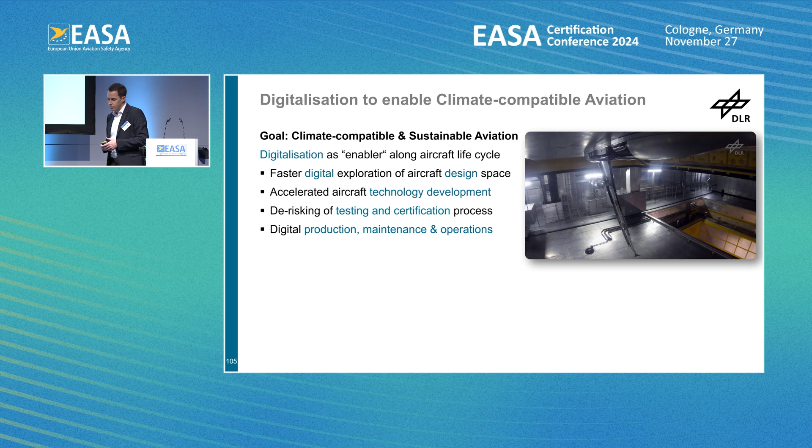We can also accelerate the whole development process if we digitally connect end-to-end the phases, from design, manufacturing, up to testing and certification. And later in the life cycle, we can apply digital twins or AI methods to series production or to operations, for example for prescriptive maintenance or climate-optimized routing and operations.

So in the end, we want to exploit all these digitalization methods, but on the other hand we also have to regulate them, as for example proposed by EASA and their AI roadmaps. So from the DLR side, German Aerospace Center, how is this covered in our aeronautics program strategy?

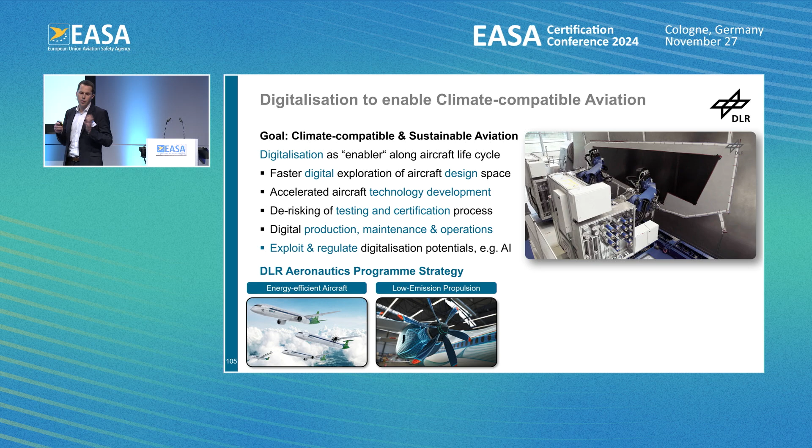Actually within 4 pillars. The first pillar is the energy efficient aircraft, covering mainly the airframe, so energy efficiency by new configurations, components, but also improved aerodynamic structures, materials, and systems.

Then the low emission propulsion, both for improved conventional engines like UHBR and open rotor concepts, but also completely new propulsion or energy concepts like, for example, SAF, hydrogen, or hybrid electric or batteries and fuel cells.

And then the emission-reduced air transport system, including atmospheric research, climate impact, or also improved ATM concepts. And then the 4th pillar is digitalization, really cross-sectionally enabling the other pillars, as described before.

So the focus today is on virtual testing and certification, or certification by analysis, concerning the timeline, because this was in the title - how long, how far, how fast.

We can say, on the one hand, we have really short-term projects and milestones up to the end of the decade, and running projects to certify specific components virtually. But we also see this topic of virtual certification as a long-term vision and goal together with our partners, so up to 2040, 50, and beyond.

So what is now the benefit and the objective of virtual testing and certification, and also the challenges? First, the idea behind virtual certification...

is really to apply modeling, simulation, and analysis to complement or support physical testing, also to partly replace it or reduce it, but not to fully replace it. So we always need physical testing and virtual testing.

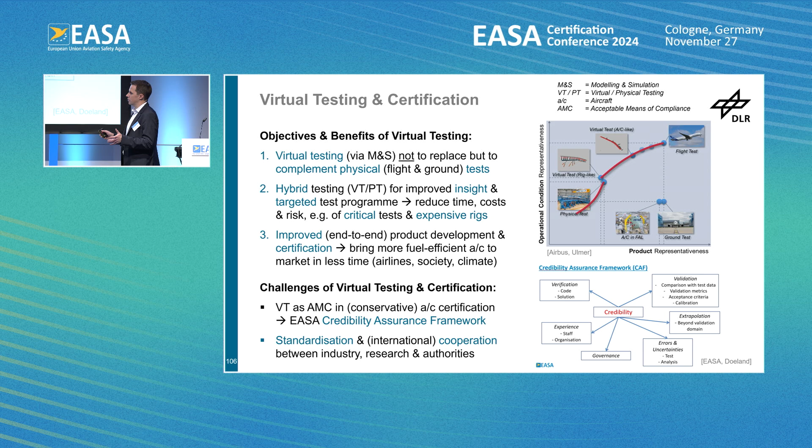Here we have nice activities of international working groups, also with industry like Airbus, Boeing, other companies, and research organizations like ours and the authorities, FAA and EASA, producing new guidelines and documents to push this forward. In the end, doing all this can even in short term bring more effort.

But on the long-term view, we really believe that this can yield the benefits that I showed before. So now coming from the generic view to DLR-specific examples, again we have our hybrid or even triangular view of virtual physical testing up to flight test.

Then in this building block approach, we see a testing pyramid, here for structures testing for example, so from material coupon up to assembly flight test level, with a trend from more virtual testing on the right side and less physical testing on the left side. Of course, it's only an example, so how much virtual testing is beneficial always depends on the specific test case.

But what is important is really to transfer between the different disciplines and components, we think, because the CAF credibility framework that we showed before holds actually for all of them, and we can transfer and learn.

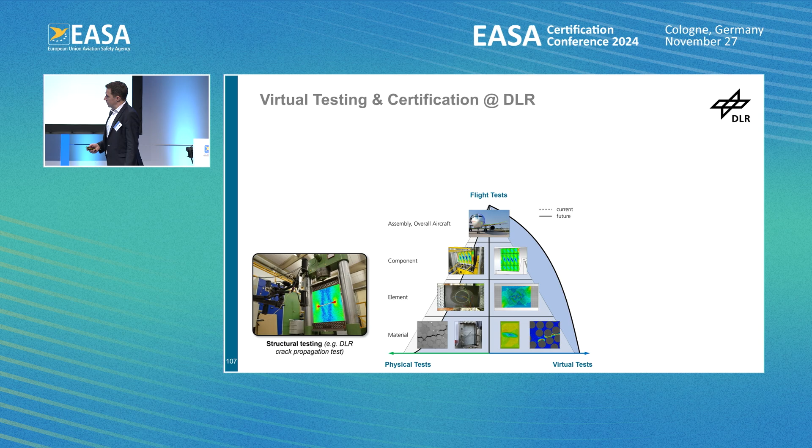For example, a DLR structural testing case for crack propagation tests, virtual and physical. We also make systems testing here for movable components, for high aspect ratio wings, ailerons, now building up this test rig in Bremen, flight control system down to actuators.

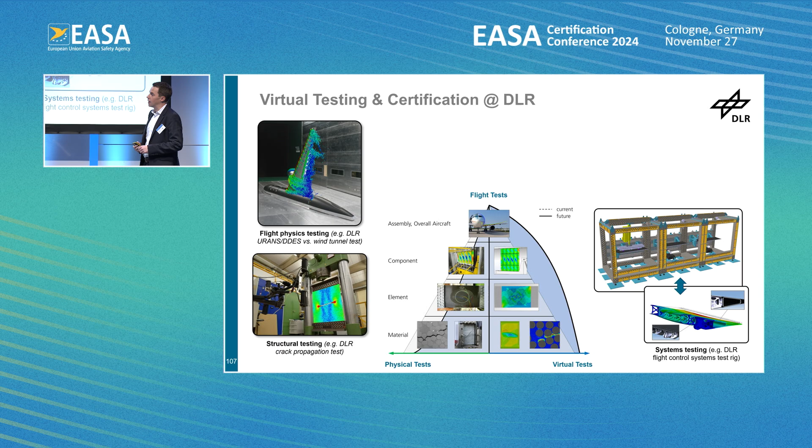Then also in flight physics, we have to combine wind tunnel testing, simulations, CFD simulations, and flight testing. Here an example of URANS/DDES CFD computations for the NASA CRM model. And then up to flight testing, real and virtual.

This we are doing with our flight test fleet in DLR. And again, the cooperation - here you see a photo from some years ago in Cologne between EASA and DLR in the frame of our bilateral cooperation agreement.

So actually now I want to give three examples from DLR side, covering the whole vertical and horizontal level. First, flight testing, virtual and physical flight testing with our test fleet. Second, a test pyramid for one example component like a hydrogen tank. And third, the end-to-end chain for a movable component.

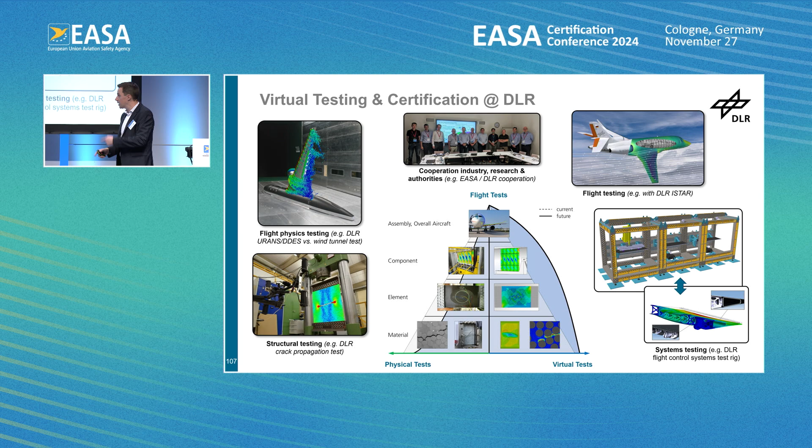So the first example, the ISTAR. Our DLR ISTAR is the newest member of our test fleet. Actually it's a Falcon 2000 LX. We bought it some years ago from Dassault Aviation.

Recently, in the HIGHFLY project with our Braunschweig and Göttingen colleagues, we did some nice flight tests and compared with simulations and computations. Before that, over recent months and years, we heavily equipped this aircraft with instrumentation - IPCT cameras, but also for example pressure measurement belts based on MEMS technique to measure the pressure over and under the wing, only to give some examples.

And with this equipped aircraft, we go into flight testing, only to give some examples. Here you can see the pilot in the cockpit making a bank-to-bank maneuver. I hope the video will start - it's quite large, so it takes a while.

You see the pilot initiating the bank-to-bank maneuver, deploying the ailerons, left, right, left, and here you see the simulation, fully coupled with aerodynamics, structural dynamics, and 6 degrees of freedom flight dynamics. We also vary parameters to see, for example, the influence of rigid or elastic aircraft.

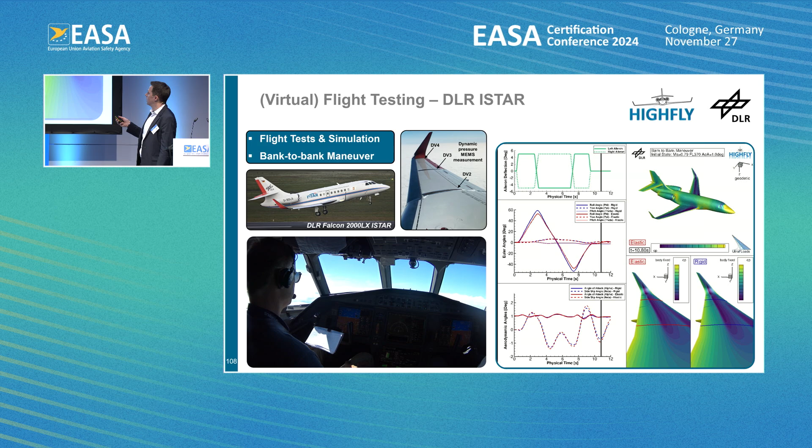Also on the wing you see the pressure distribution here nicely. Then the second maneuver, this is now a pull-up, push-down maneuver at transonic speed. Again the pilot in the cockpit initiates the maneuver, pulling and pushing up and down, and then you can see the simulation again.

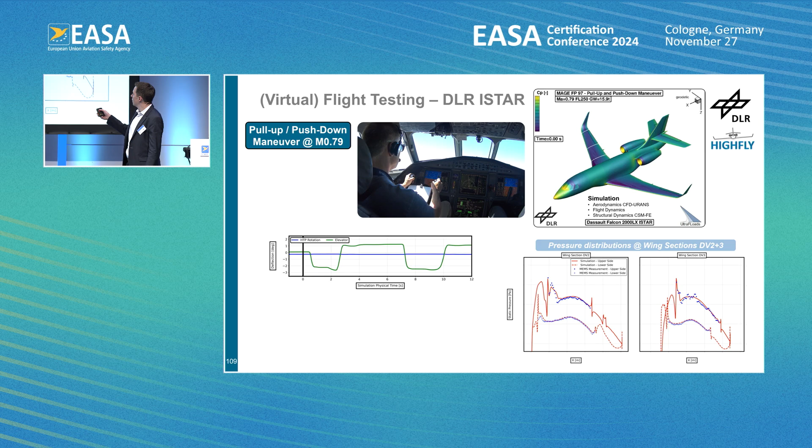And then we really compare the pressure distribution on the wing with CFD computation - you remember the MEMS pressure belts. At transonic speeds it's not so simple, but you can see quite a good agreement, which is good because the sensor technique is quite new and in-house developed. Also for the flight mechanics parameters, we see good agreement.

Concerning the uncertainties and tolerances that I mentioned before, we introduced some bands that are also used to create or build real flight simulators from our testing colleagues in Braunschweig. You can also see that it's quite a good match within those tolerances. So the message here is we are doing that with a lot of flight tests - there are other tests done with EASA, like ground vibration tests, engine tests, and so on.

And here we can learn a lot and also discuss with Dassault and other industry partners, and with EASA, to give recommendations if we can believe these simulation methods and also transfer them to other aircraft.

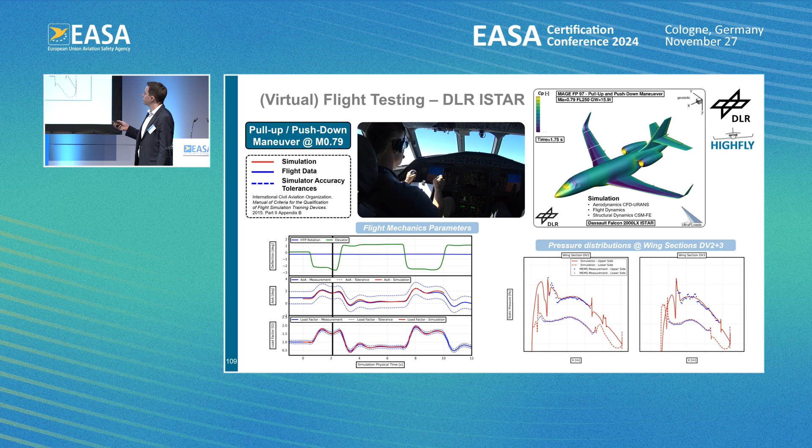Second example, hydrogen tank. I don't want to go into all the details of hydrogen-powered aircraft, but it's really new in aviation and we don't have much experience or knowledge there. We can learn a bit from our space colleagues, for example from Ariane, also in Bremen, from DLR space colleagues who have much experience in hydrogen handling. But in aviation we have much more challenging requirements in terms of thousands of load cycles, load cases, hydrogen handling, tank integration, and so on. It's challenging also in terms of certification, since it's a completely new component. So we need intense physical and virtual testing.

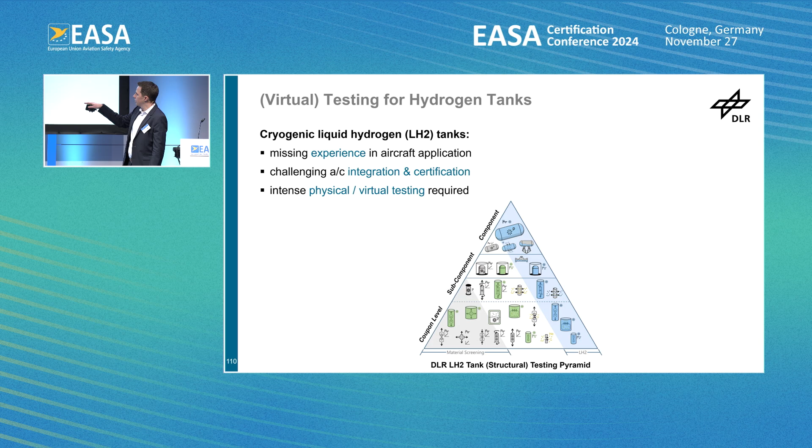At DLR we set up a new testing pyramid in recent years, focusing on structural testing, again with a building block approach. You can see three elements: bottom left, first material screening in gray, then we go up to liquid nitrogen testing before the more dangerous part, liquid hydrogen testing. On the coupon level, for example, we analyze the material first in terms of permeability, permeation of the hydrogen through the walls, both for metal tanks and CFRP tanks.

Here's an example of crack propagation in the CFRP laminates of a CFRP tank. We're also building bigger test infrastructure up to subcomponent and component level, like half tank and full tank tests of different sizes, such as 400 millimeters, and here a 1.7 meter tank test, also for burst pressure tests and permeation tests.

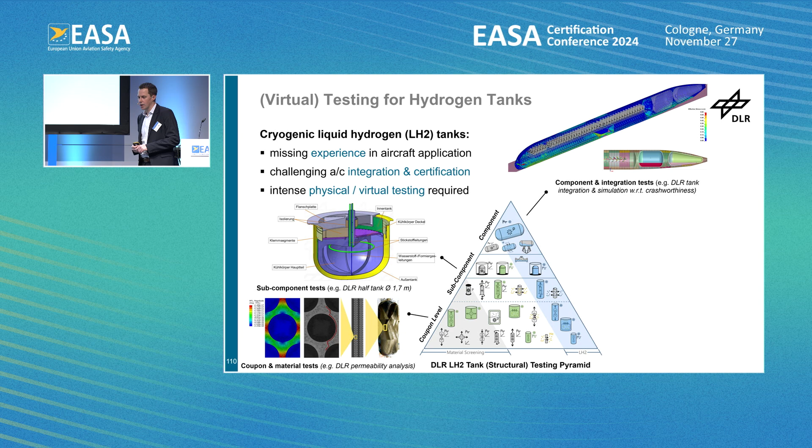Then at the overall aircraft level, simulation is really important if we want to integrate the tank into the aircraft, for example the rear fuselage, and simulate with respect to crashworthiness. We really need simulation because we cannot test so often. We also derive new recommendations from all these simulations that we exchange with EASA, our colleagues from DLR in Stuttgart are doing that.

And then finally, after the structural testing, we of course also need the systems testing. Here's an example of our space colleagues in Bremen with a hexapod with an Ariane tank on it, and the hexapod can simulate the dynamic behavior of the tank with the fluid inside, in terms of sloshing, for example.

We also have to simulate the filling and draining of the tank, including the sloshing. With CFD computation we can simulate the sloshing, which is quite complex compared to kerosene because we have the gaseous and the liquid state, and this behavior is really complex. Also there's the feeding through the pumps up to the engine, and this interaction of sloshing, choking, and so on. This is only to give you some examples.

We need physical testing, but if we also build a virtual testing pyramid, simulation can really help spare or make more specific physical testing, validating in between. We don't know when the LH2 aircraft will come, but maybe this helps get it a bit quicker into the market.

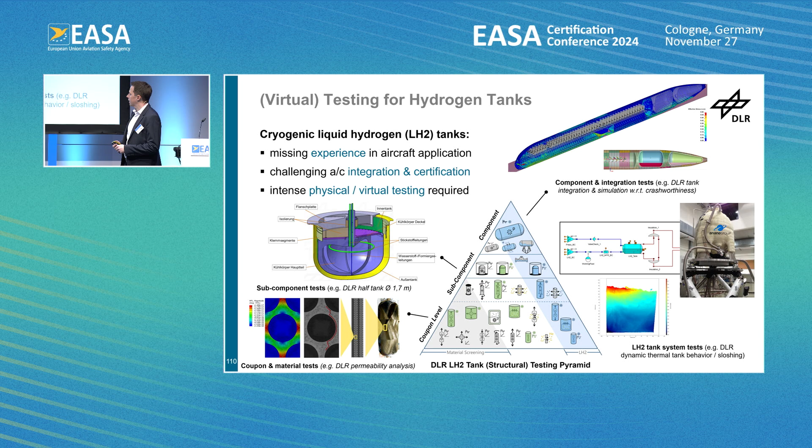Then the last example - you remember the end-to-end chain to really shorten the development cycle up to certification. Here we worked in our Virtual Product House in the ECOMAT Technology Center in Bremen. This is an integration platform from DLR with different DLR institutes, but also industry partners like Airbus sitting in the same building, Liebherr and other companies, and EASA is closely involved on technical and management level for this initiative. The Virtual Product House focuses on virtual certification and end-to-end development for specific components like LH2 tanks, and the main component was a movable of an aircraft wing.

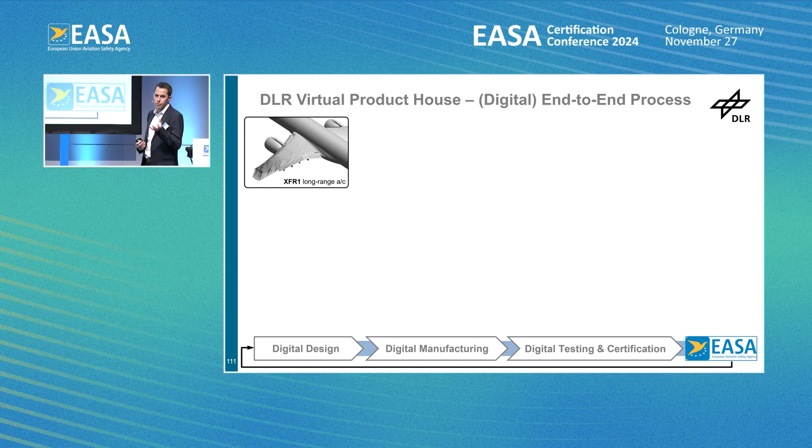So what did we do? We start with an aircraft, simulate and design the whole wing, including all the aerodynamics, structural interactions, the systems design of the flaps, the kinematics of the flap mechanism, like track rear link mechanisms, for example. Then we focused on a specific outboard flap movable and designed a new component, a composite multispar flap - a CFRP component with integral load introduction. And we manufactured it, simulating the manufacturing process first to have both the design and the manufacturing.

And then after the simulation, we also went into physical manufacturing. You can see the video in the background. That means the CFRP type of flap we really manufactured to validate the virtual manufacturing.

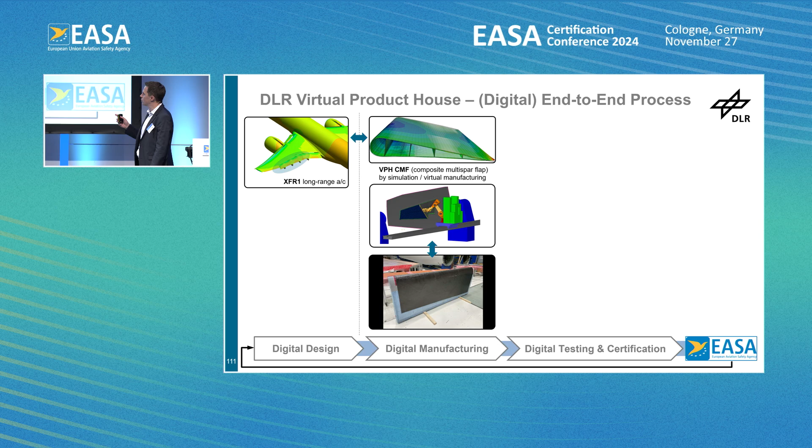This includes all the fiber placement, sensor integration, preforming of the skins and the spars, and then it goes into the autoclave, including infusion and then demoulding. And at the end, you have the manufactured flap.

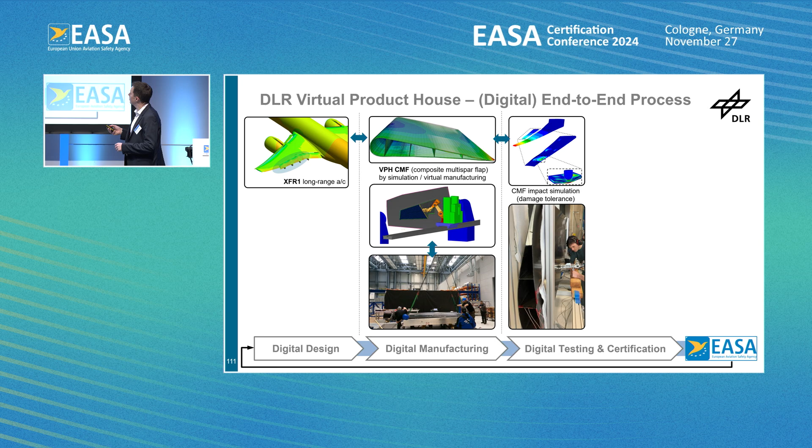With our flap as designed and the flap as built, we go into testing procedures. For example, structural testing for impact simulation and damage tolerance. Again, virtual testing and physical testing to compare, to learn, to validate. And for example, also systems testing.

The systems testing means, for example, if we have a failure in the transmission system, like a shaft rupture or a shaft failure, you can see the movement of the flap in a co-simulation or multi-body simulation, and then the interaction of systems and structural behavior. And we can also feed it back to the flight performance.

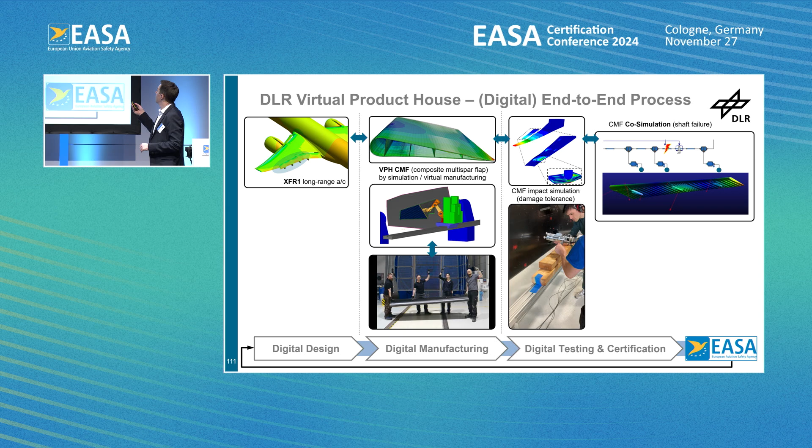And also here, as shown before, we are building now a physical test rig in the next months, and then in the next years testing there together with Airbus in Bremen, but also with Liebherr, for example, for actuator components that are used for the flight control system, to use movables for flutter suppression on high aspect ratio wings. And you can see here the paragraphs from CS25.

So actually here we really produce documents on how to build the model, how to verify, validate, and exchange with EASA on the different paragraphs for systems, testing and manufacturing, to learn from EASA and vice versa.

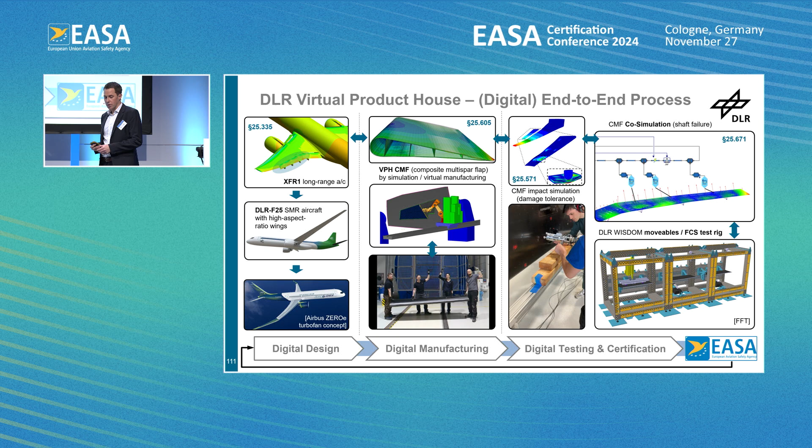And as we said, now in LUFO and Clean Aviation projects, together with partners, we're focusing on the high aspect ratio wing, really applying these movables and also this end-to-end chain, and trying to mature it as much as possible for future aircraft configurations. So, last slide of my presentation.

To conclude, of course, I only showed a few, let's say 3, examples of DLR. Of course, we also have other examples in the virtual engine sector. We have the site, the Crash and Impact Testing Center close to Stuttgart, and also other EASA relevant topics, for example, for UAS in Cochstedt.

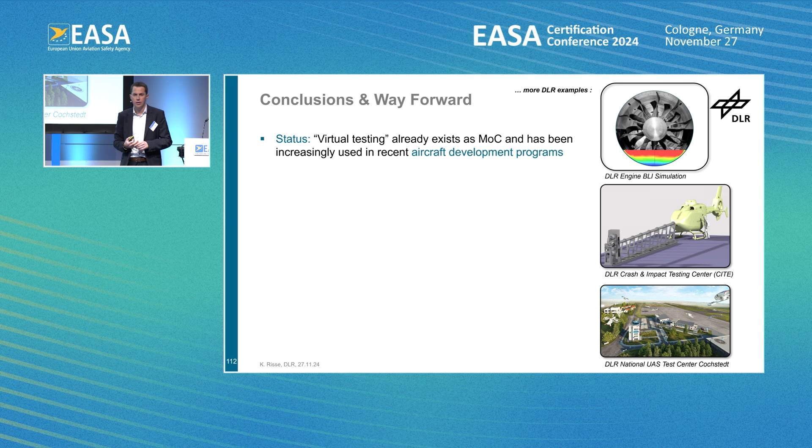But to conclude on this presentation, we can say virtual testing is not new. It already exists as MOC in the CS25, and it has been increasingly used in recent aircraft development programs, more and more, but there's still broad and high potential, including the shortening of the development time and to spare physical tests, especially for new components.

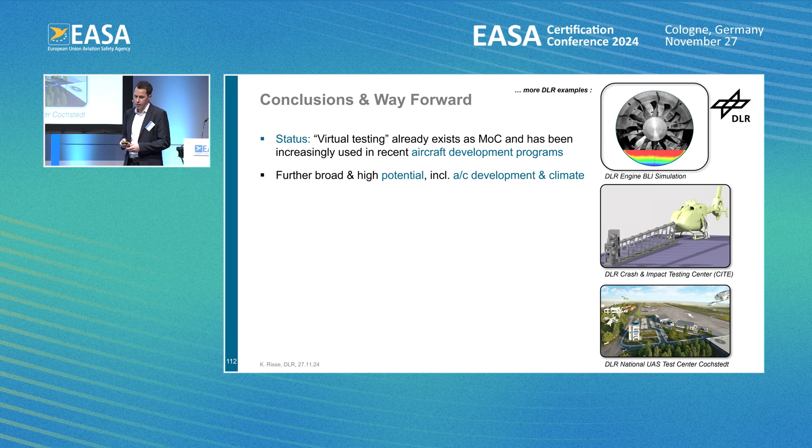But we have the industrial requirements and also the EASA requirements concerning the credibility framework. So what is the message?

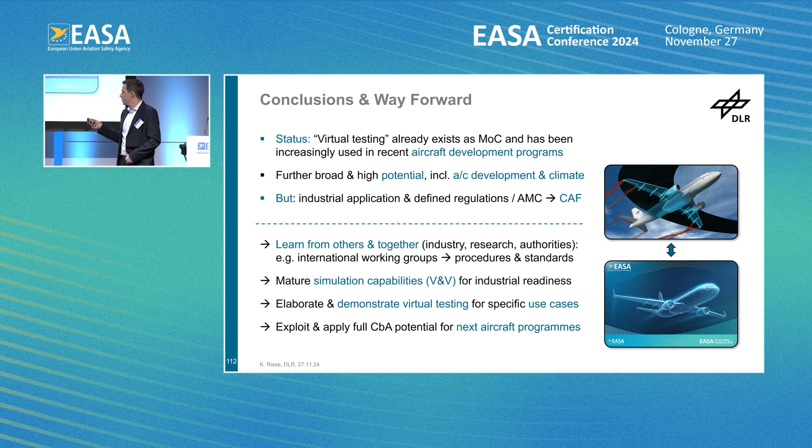And then, of course, mature the simulation capabilities at the borders of the envelope and beyond, learn from the different disciplines and components, and further elaborate on specific use cases, maybe as I've shown before, and really exploit the full CbA potential for next aircraft programs, if it's ready, and use all the benefits I showed before for digitalization in aviation, for climate-compatible aviation.

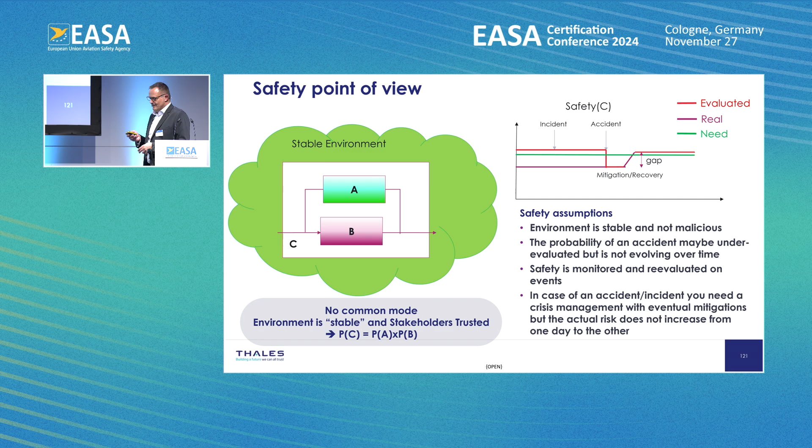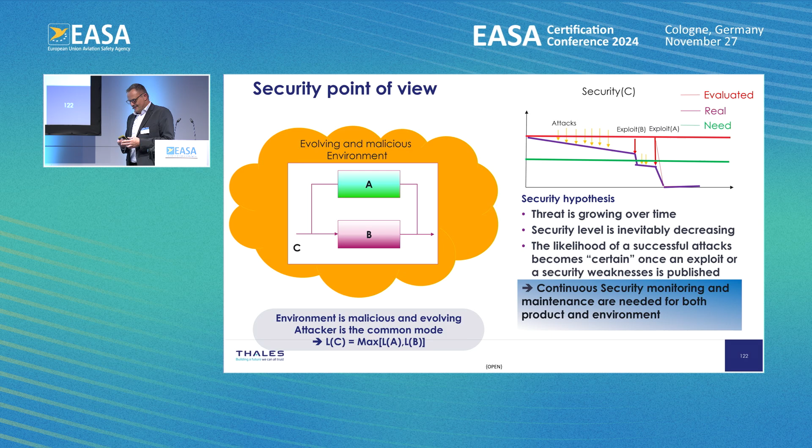What does it mean? It means again that you have to continuously monitor your cyber threats that may impact your systems. So what can we do now? First challenge is that, as you know, cyber threats evolve all over time. There are new cyber threats, new attackers, etc. And the challenge we have is to synchronize the protection of the system with the rhythm of the vulnerabilities that are found.

To do that, we have to permanently monitor incidents and events, as I said before. We have to deploy a policy to quickly patch our systems. If we are acting on an aircraft, maybe the fix will take some time due to certification. So you have to interact outside the aircraft by securing the data outside the aircraft.

So this is a conclusion slide. As I said before, we have to consider end-to-end security for aviation data. We have to make some reflection about the certification process to handle cyber threats and how to fix cyber threats in the frame of the certification process today. We have to prepare cyber resilience in operation, which means that we have to filter and secure all data during operation outside of the aircraft.

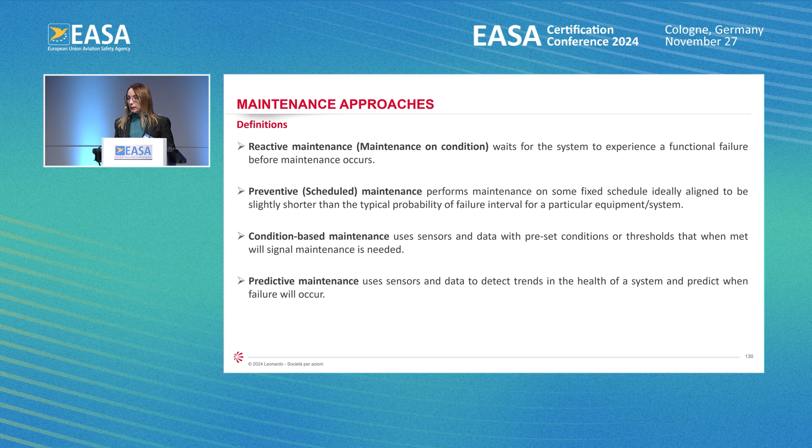Before we start, I would like to do some definitions. We can identify two main different philosophies in terms of maintenance. The first one is reactive maintenance, where the maintenance activity is performed after the occurrence of a failure. The second one is proactive maintenance, which is performed before the occurrence of the failure. Within the proactive maintenance philosophy, we can identify some different maintenance approaches: preventive scheduled maintenance, where the maintenance activities are performed at a scheduled interval, and then we have the condition-based maintenance and predictive maintenance that use sensors and data to provide the evidence that we need a maintenance action, to perform a maintenance action.

Looking at a typical maintenance program for Leonardo Helicopters, we have different inputs coming from, for example, analysis and tests performed during the certification phases, like analysis performed to provide compliance to 29.1309 or 29.571, for example, for fatigue. And then we have also the scheduled maintenance tasks derived from the MRB process, linked to the MSG-3 analysis, together with the possibility to introduce some unscheduled maintenance tasks based on in-service experience.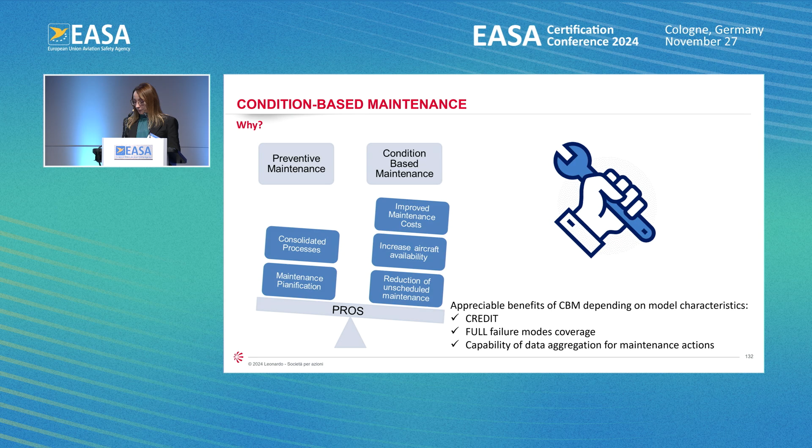All those indicated benefits are linked to the fact that we can take credit for the models that drive the condition-based maintenance, and we also have full coverage of the failure modes that require maintenance action, together with the fact that we can have data aggregation so that we can organize the stop of the aircraft based on the opportunity linked to the operability and the environment of the aircraft.

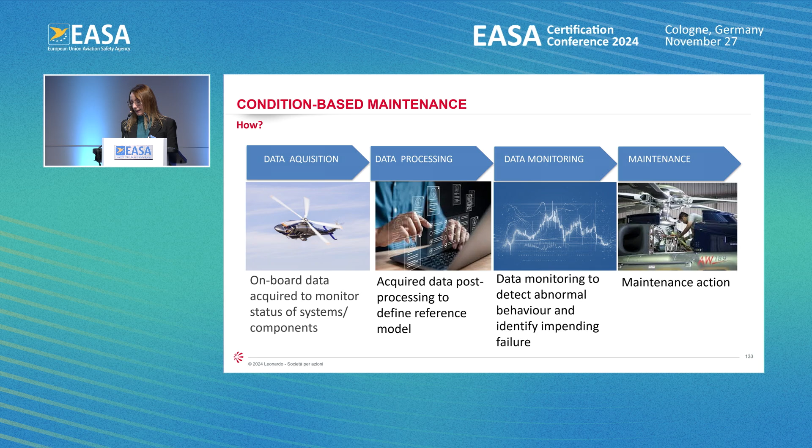Moving on to the detail, I identified 4 main steps for condition-based maintenance, which we will go into detail in the next slide. About data acquisition, it is important to acquire a sufficient number of parameters to properly monitor the system. Then we also have the need to select the data and the position of the sensor.

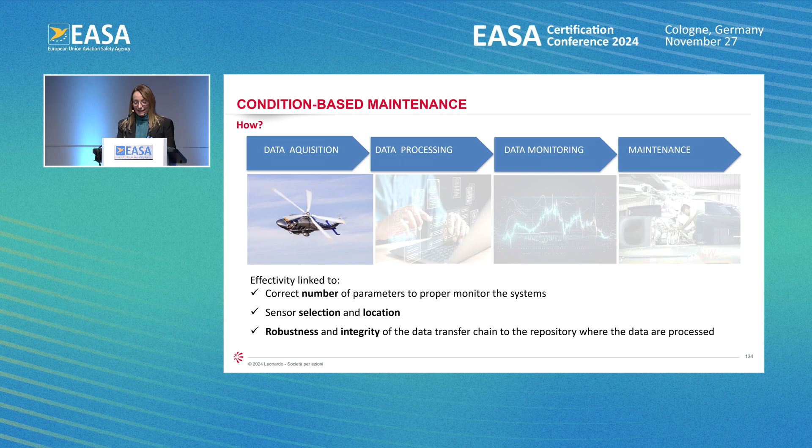Finally, it is also important that the data transfer chain from onboard to the ground station, where the data are processed, should have an adequate level of robustness and integrity.

The acquired data are then processed in order to enhance the visibility of alteration with respect to a reference model. A combination of different processing techniques can be used depending on the type and amount of failure mode that need to be monitored. In particular, these could be model-based algorithms, which are based on the physical knowledge of the system behavior.

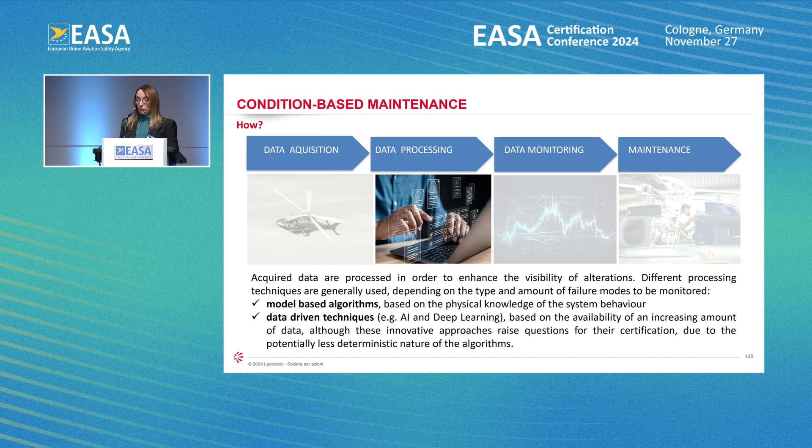But also data-based algorithms, which are based on data-driven techniques, like, for example, in recent years, machine learning and deep learning techniques, which are gaining visibility thanks to the fact that digitalization allows the availability of a large amount of data in this period.

Then we move to the data monitoring phase. The processed data are monitored with reference to a threshold defined within a model algorithm, in order to inform the operator that a maintenance action is needed because there is the risk of a failure condition.

Conventional processes involve the use of models based on the fact that each parameter is compared to its specific threshold. But in recent years, we can also take advantage of multivariate models associated with machine learning techniques, for example, where multiple parameters are fused into a single indicator to be compared with a threshold in order to detect that a maintenance action is needed.

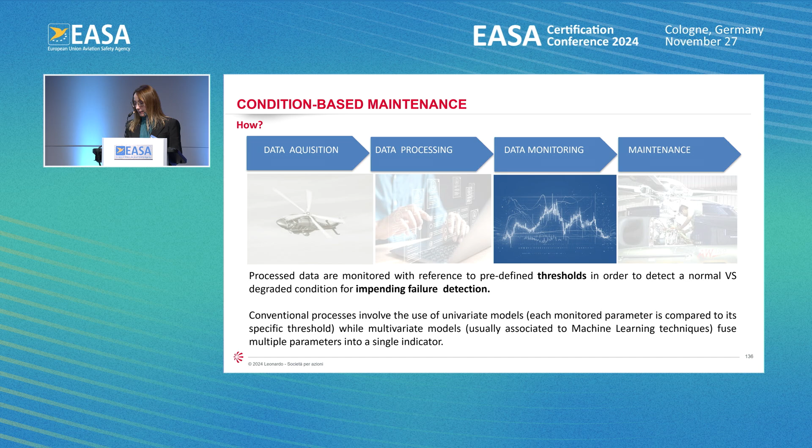The goal of condition-based maintenance is the fact that we can perform maintenance only when it is required, because there is a risk of an impending failure, instead of doing it at a prefixed interval, sometimes determined well before the occurrence of a failure.

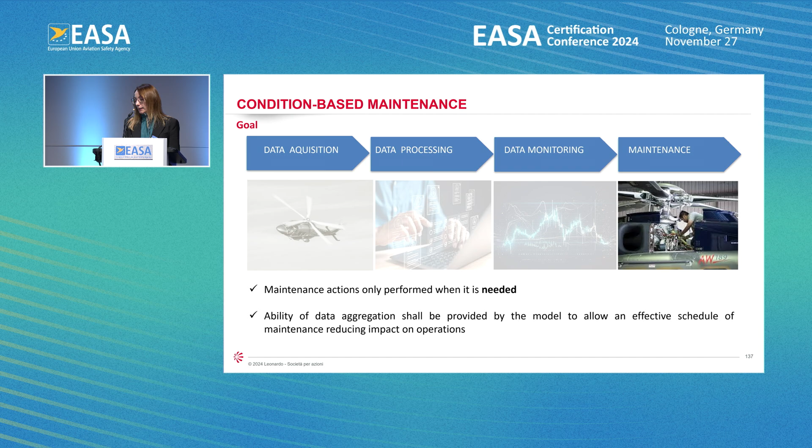To summarize the steps I have identified here, which is a step forward from the preventive maintenance approach—the typical one—to condition-based maintenance, this is based on different steps. The first is, for sure, the capability of acquiring a sufficient number of parameters, which allows us to detect all the failures for which we need a maintenance action.

About this, together with the physical sensors, which are limited in terms of the possibility to install them on helicopters, for example.

Thanks to digitalization and machine learning techniques, today we are able to acquire and process a large amount of data from, for example, experimental flight data and also customer flight aircraft usage, which can be used to implement virtual sensors. Those virtual sensors can be used to reconstruct a signal from components that don't have a physical sensor associated with them, and then we can get a complete view of the behavior of that component.

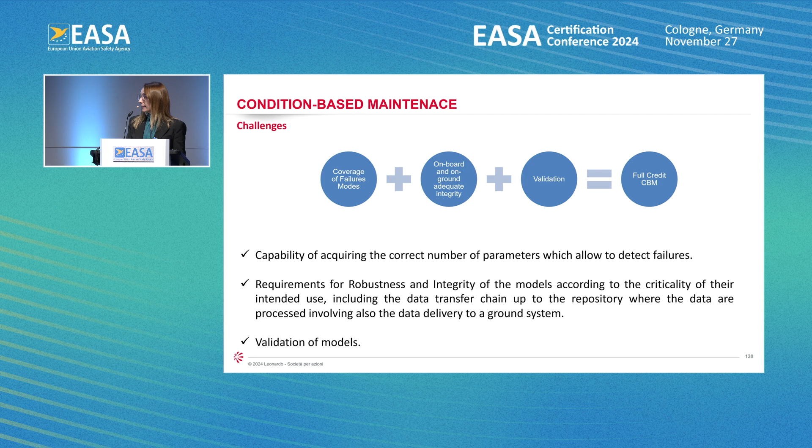So to conclude, I think that today the methods for predictive maintenance are typically considered without credit. So the maintenance raised by those kinds of systems are performed in addition to the standard preventive scheduled maintenance programs. Therefore, a step forward with respect to those well-consolidated approaches is needed.

What I think is that instead of a complete removal of a scheduled maintenance program, what is more feasible could be to have a sort of hybrid maintenance program where some preventive maintenance tasks are completely replaced by predictive tasks. So this could be a more achievable goal based on the failure mode identification and the coverage that we can assure.

Through model-based techniques. Nevertheless, even in this case, we need to have certification rules and guidance material to define how to give credit to this model. That's it. Thank you.

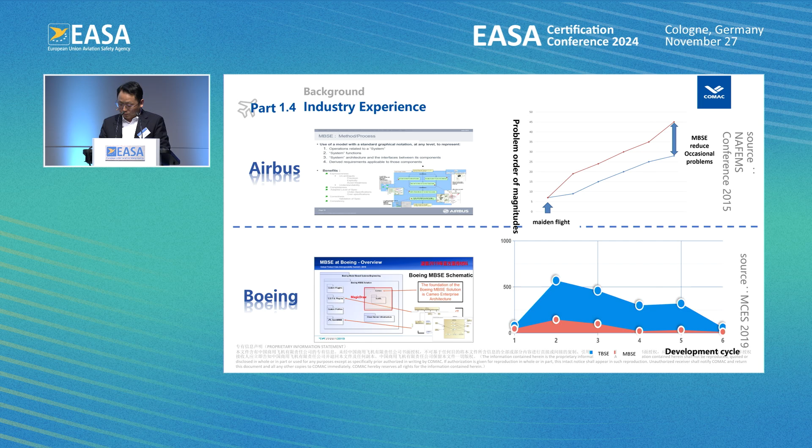COMAC has successfully developed the C909 and the C919. There are more expectations and requirements for the next generation aircraft development. So we make a plan for COMAC MBSE practice exploration.

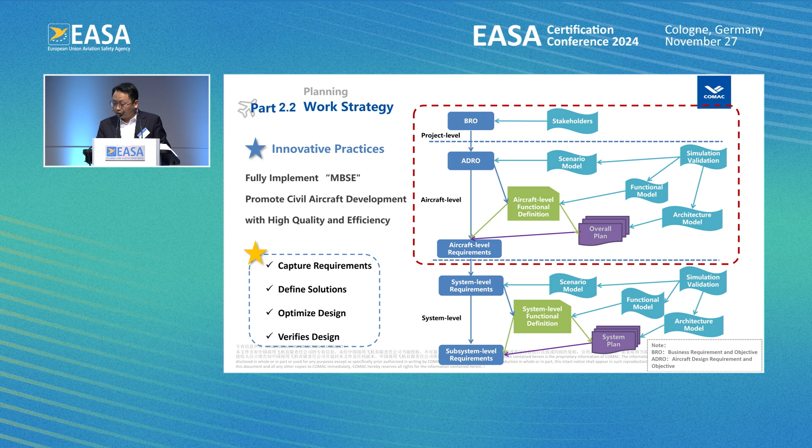We carry out the innovative practice by advanced methods driven by requirements, fully implementing MBSE to promote civil aircraft development with high quality and efficiency. By modeling, we can capture requirements, define solutions, and also optimize and verify design.

Doing the modeling in the scenario models, we can take the aircraft as a black box. The key is to sort out the real feedback of the aircraft in different operating scenarios and different fault conditions.

Requirements are captured through the function models. Then the aircraft is turned into the white box. For each function, analysis is conducted to obtain the function requirements and interfaces. Also, we can check the interface match by using tools in the architecture model. The design is verified by the mechanism model.

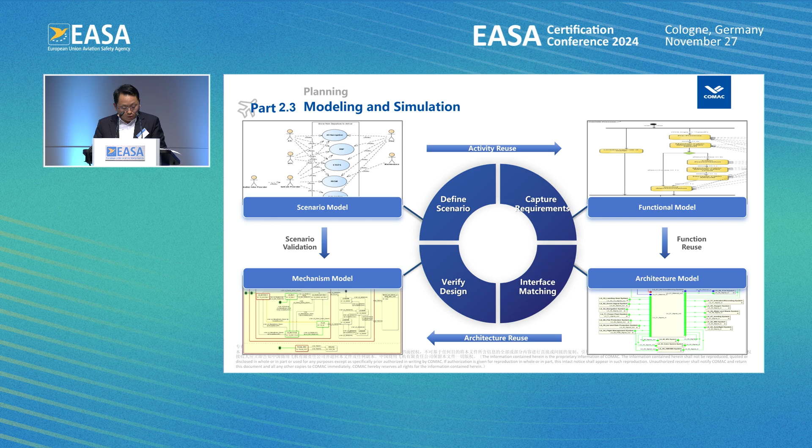Under the scenario models, we carry out simulation verification to ensure the system logic correctness and integrity. To ensure the continuity of the data, the architecture models define the simulation model architecture, interfaces, and the scenario models, and specify the scenario cases. Through standard interface conversions, this information is transferred into the simulation model to ensure the coherence of the data.

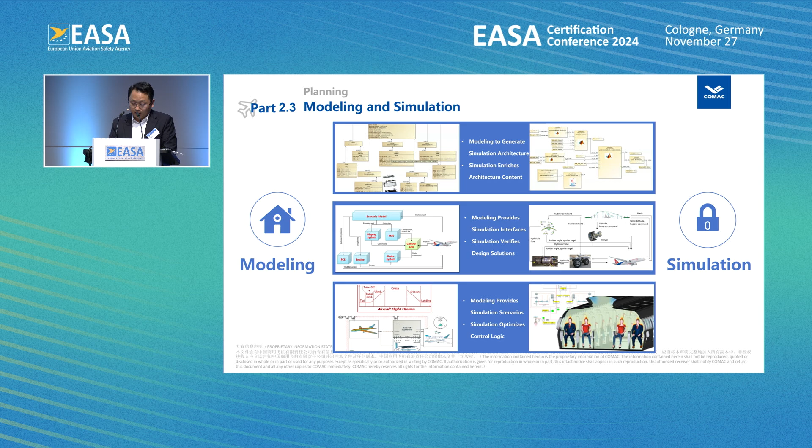Also, we have planned the digital mockup that covers the entire product life cycle, expanding the digital mockup from the design fields to the manufacturing, flight test, and customer service fields.

By reorganizing and refining the different views on the same model, we have established a connection between the front end and the back end data. We have also built the online design environment, helped by Dassault, which can put all the architecture design, structure design in the same environment and build the process.

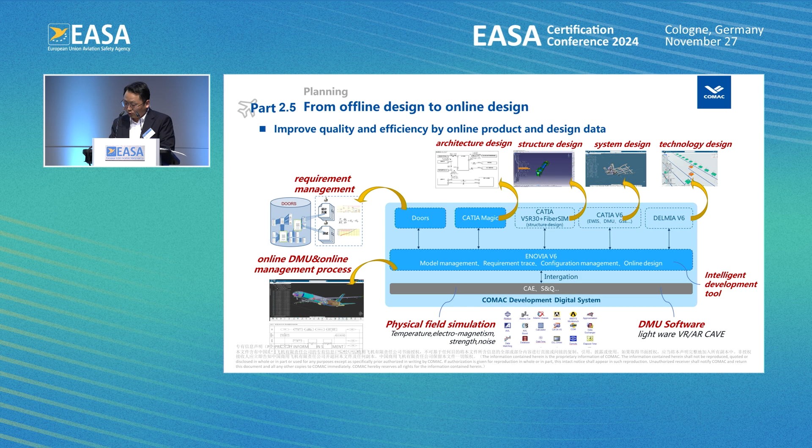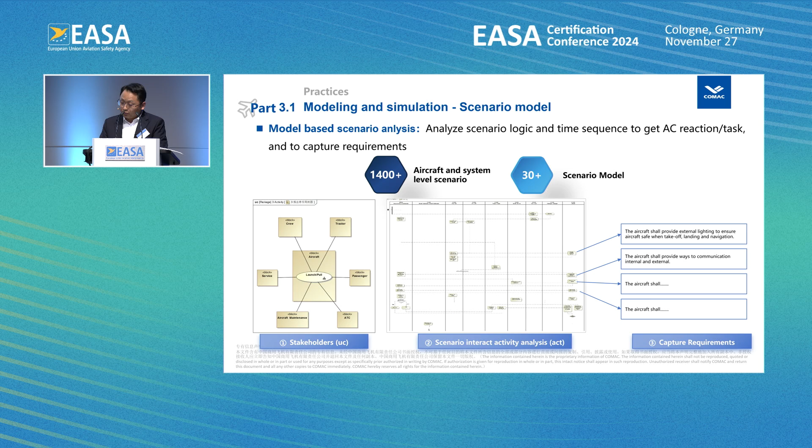Next, I will introduce some practice cases. During the modeling, we conduct model-based scenario analysis to capture design requirements. By analyzing the scenario timing and logic, we obtain aircraft response and tasks. We conduct a model-based function analysis, combined with the operational scenarios, analyzes the logic of a functional operation, identify interaction relationship, and capture functional requirements and interfaces.

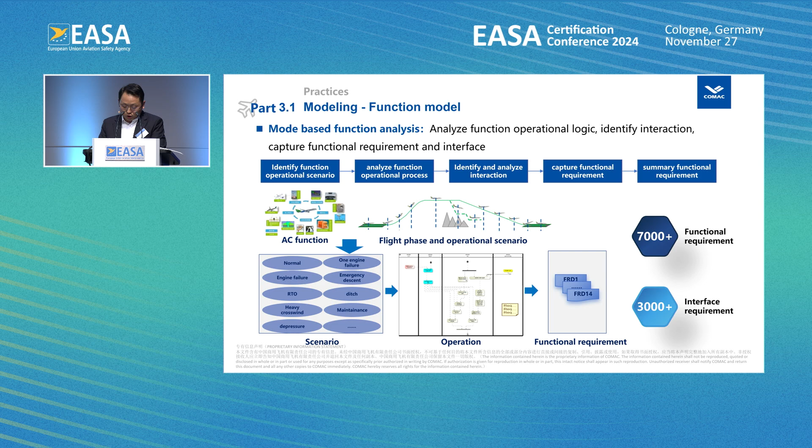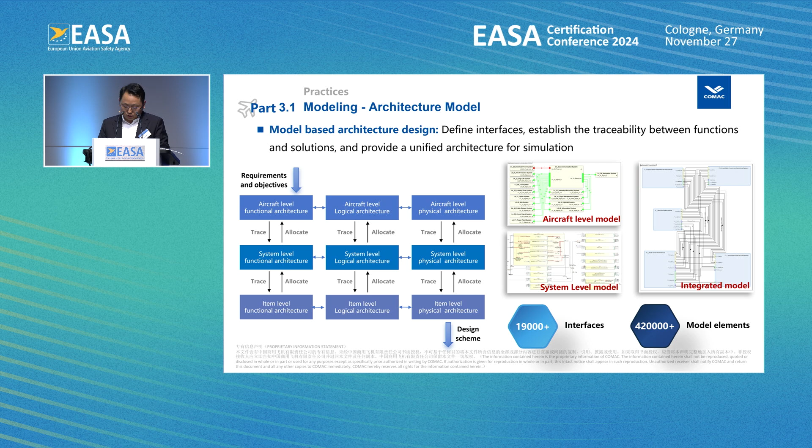Based on the function analysis results, we carry out a model-based architecture design, define interfaces, and get a unified architecture for simulation. For the design architecture, we further conduct model-based mechanism analysis to analyze the working modes. We identify unexpected errors in logic, verify interface matching, and improve the correctness of the requirements and interfaces.

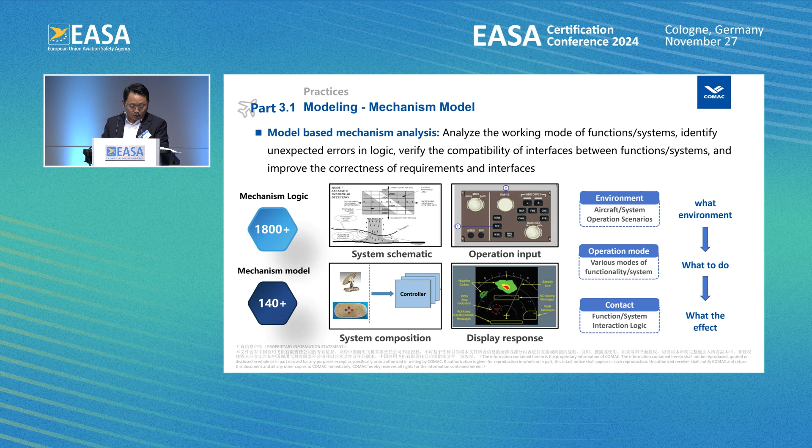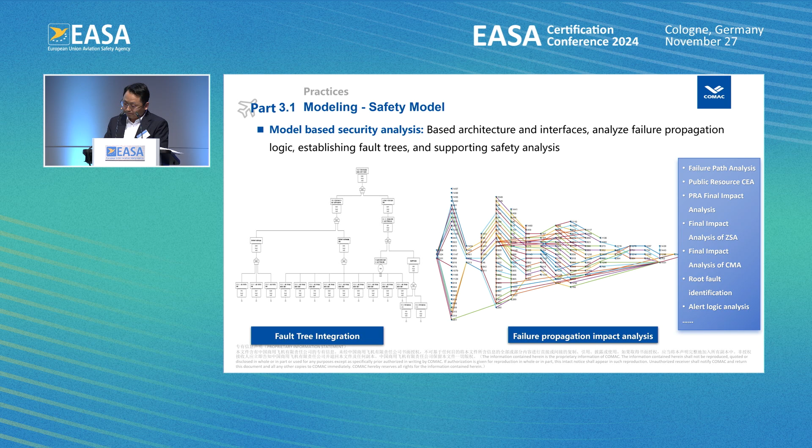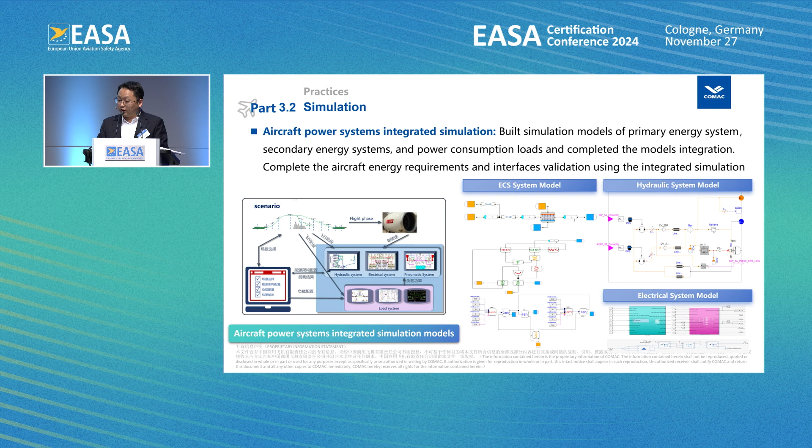After the design work finished, we will use simulation methods for design, verification, and validation. For example, the aircraft power system integrated simulation. We built simulation models of primary energy system, secondary energy system, and power consumption loads to complete the model integration. Completed the aircraft energy requirements and the interfaces validation using the integrated simulation.

Based on this work, we have achieved the electrical, hydraulic, and pneumatic requirements calculation for different scenarios, as well as the consumption rate of the full profile.

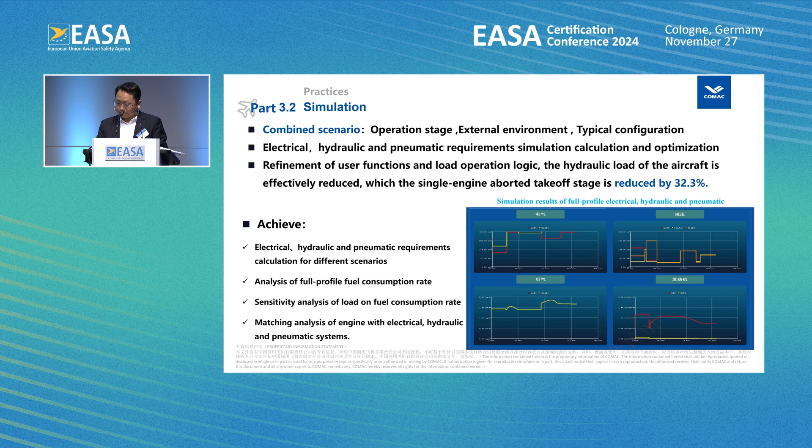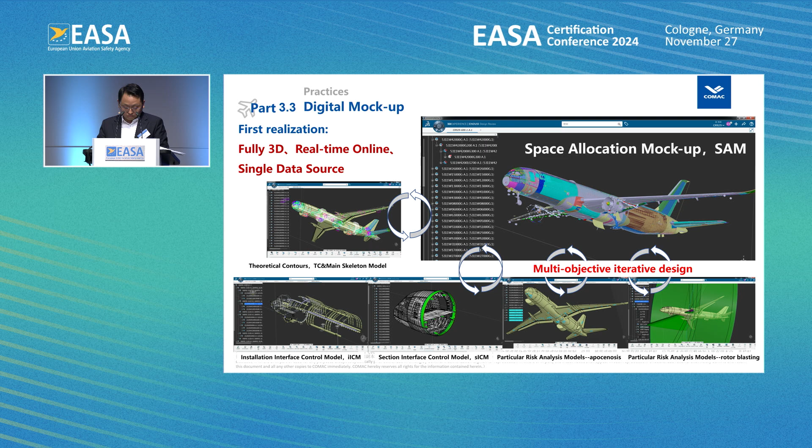We have achieved the construction of a fully three-dimensional real-time online and single data source digital mockup. Based on the TC and main skeleton model, carry out the space allocation mockup, as well as the installation interface control model and the particular risk analysis model, continuously iterative.

Now it's time for the summary. Based on the previous exploration, we have achieved the following. First, we establish a forward design process for civil aircraft based on requirements, and throughout the design for scenario, function, architecture, mechanism, safety, and simulation. Second, we form a complete design chain from aircraft level, system level to atom level, ensuring the upstream and downstream data transmission and traceability.

We also customized deeply tools based on the design process and the development requirements, achieve partial business automation, and improve design efficiency. Finally, we've constructed a model management system and process, coordinate and standardize the various major design simulation activities, and ensure the unified management of the model data throughout the entire life cycle.

For the future, we also face many challenges. How to make designers change their conventional design approach, accept model-based design process, and learn new tools. Sometimes engineers will ask us, my document is very excellent and approved, why do we need to build new models? So at the project level, we need to accept the associated costs.